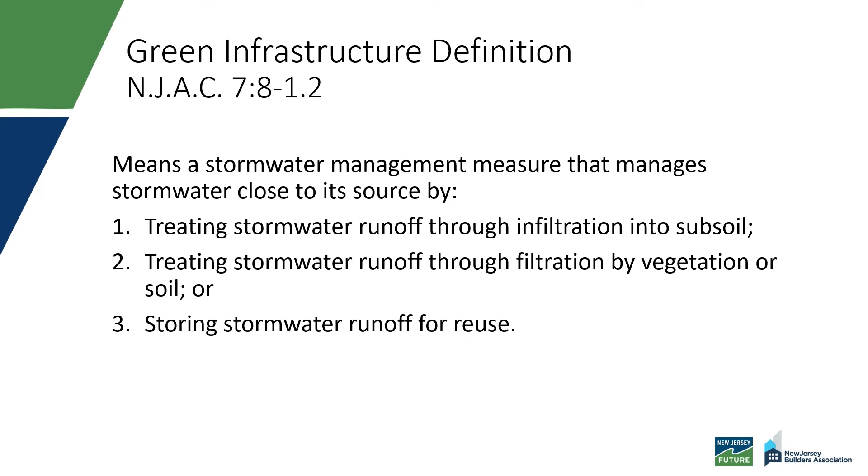The department incorporated into the new definition the specific time frame within which prior development must be considered in conjunction with the proposed new development to determine the ultimate impact of the development. The dates are now clearly specified within the definition in an effort to cut down on attempts to circumvent regulation by phasing or dividing projects into pieces that individually are below the threshold of major development.

As I mentioned, we are not changing the standards, just how the water quality standard is applied. Since motor vehicles are a significant source of suspended solids, water quality applies to the impervious surfaces constructed for these vehicles, and this is consistent with how water quality was triggered in the past. Roofs and sidewalks still need to be accounted for in terms of quantity and recharge, but not in terms of quality. Again, the motor vehicle surface term has been incorporated into the definition of major development.

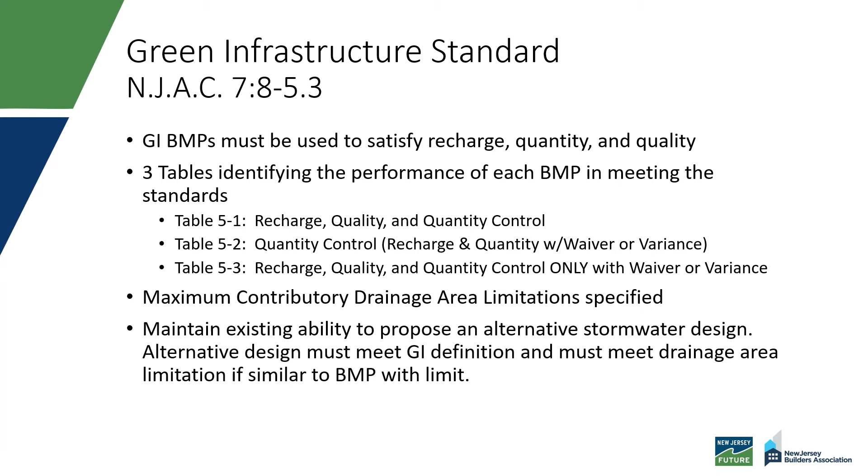Some of these BMPs cannot receive runoff from vehicle surfaces and therefore do not address water quality, like cisterns and green roofs. Others do not attenuate the discharge of stormwater runoff from larger design storms, so they cannot meet the quantity control requirement, like dry wells.

There are even certain manufactured treatment devices, or MTDs, that have a vegetative or soil component that meet the green infrastructure definition. Note that not all MTDs are considered green infrastructure. Lastly, these small-scale systems noted here have a limited drainage area that they can treat.

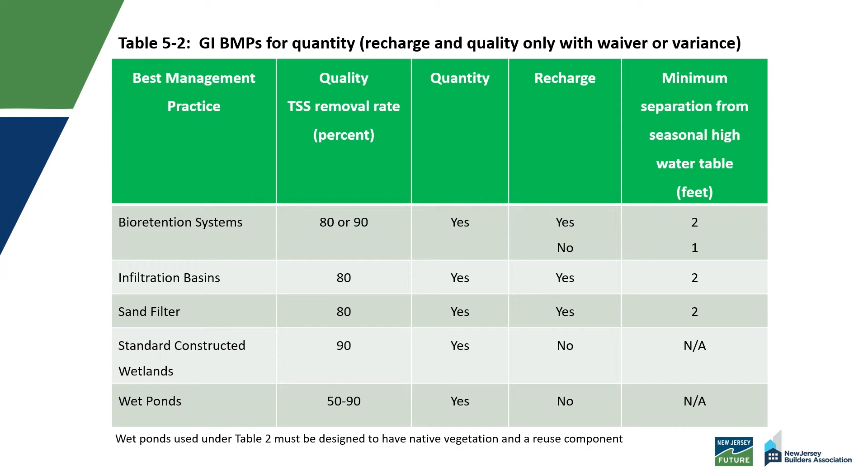Here's table 5.2 showing the BMPs that can be used to address stormwater runoff quantity control. These have drainage areas that are a bit larger or typically located a bit further from the source of the runoff and may only be used to meet the water quality and recharge if a waiver is granted.

The BMPs in table 5.3 always require a waiver or variance before they can be used. It's not anticipated they will be used much in the future because of what is required in order to grant a waiver or approve a variance.

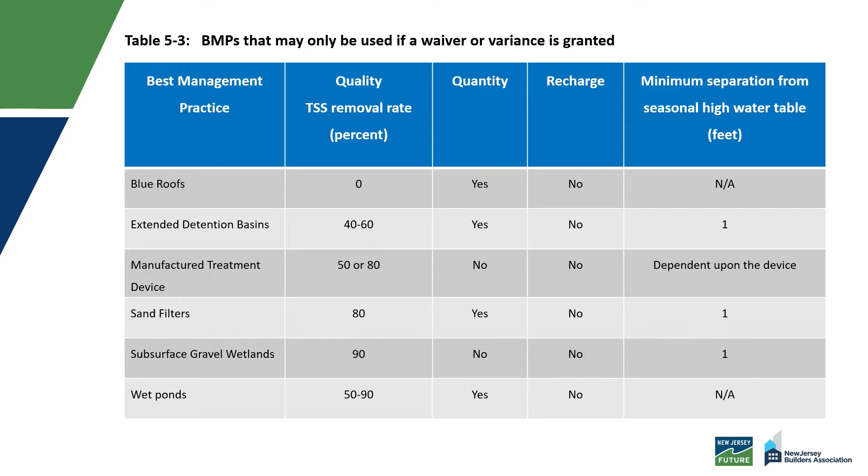Blue roofs don't have a reuse component, and extended detention basins are typically large and require additional treatment to meet water quality standards. The bulk of the MTDs do not have a soil or vegetative component, so they fall into this table. And we don't see many subsurface gravel wetlands or wet ponds, as wet ponds have a 20-acre minimum drainage area requirement with no reuse component.

So just a few things to remember under the newly adopted rule amendments. Prior disturbance since 2004 and on, in combination with any newly planned disturbance, may cause the project to be considered a major development and subject to the standards. Green infrastructure is required to be used, and stormwater runoff must be treated close to its source. For water quality, it's motor vehicle surfaces and not impervious surfaces under the modified definition.

You can see the rule proposal and the rule adoption document, which includes the response to comments. You can take a look at the web link that's noted there to find these documents. One aspect of the rule is that it has a 1-year delayed operative date and does not become effective until March 2nd of 2021. In terms of development, there are grandfathering provisions specified within subsection 1.6b of 7:8.

These provisions address both local approvals and, where needed, department approvals in terms of what can be grandfathered in under the old version of the rules. I can't go through each aspect, but one component to be grandfathered would be to have a preliminary or final site plan approval from the municipality.

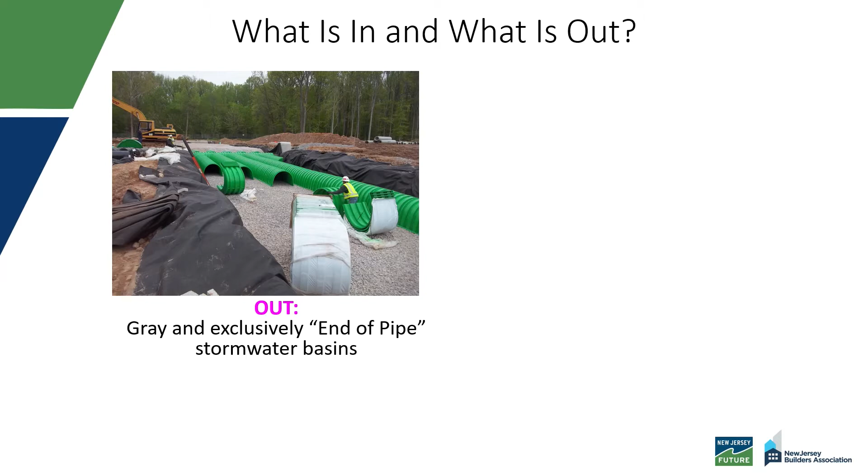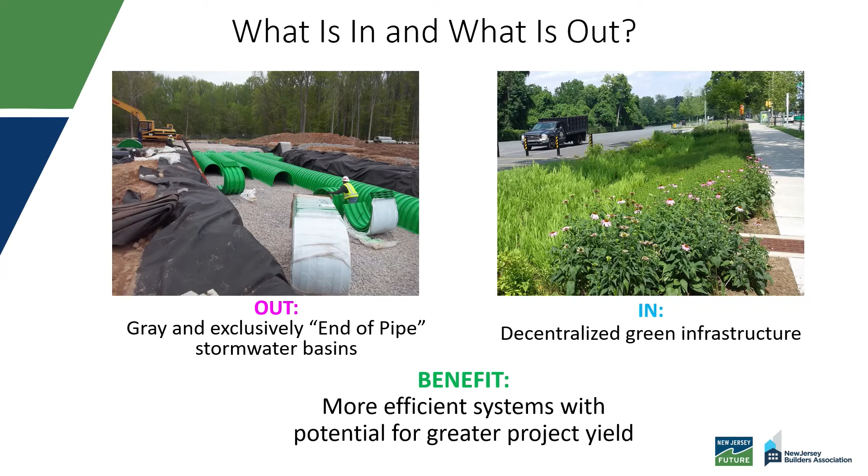So first, gray and exclusively end-of-pipe stormwater basins. I think we're all used to the practice of cordoning off a section of our sites, whether it's commercial, subdivision, mixed use, and identifying it to be our big end-of-pipe stormwater storage place. Under the new rules, what's in is a decentralized approach to green infrastructure. The benefit to be gained by this is more efficient systems with potential for greater project yield. And I don't know who's going to argue with the potential of getting an extra lot or more developable area on a project site.

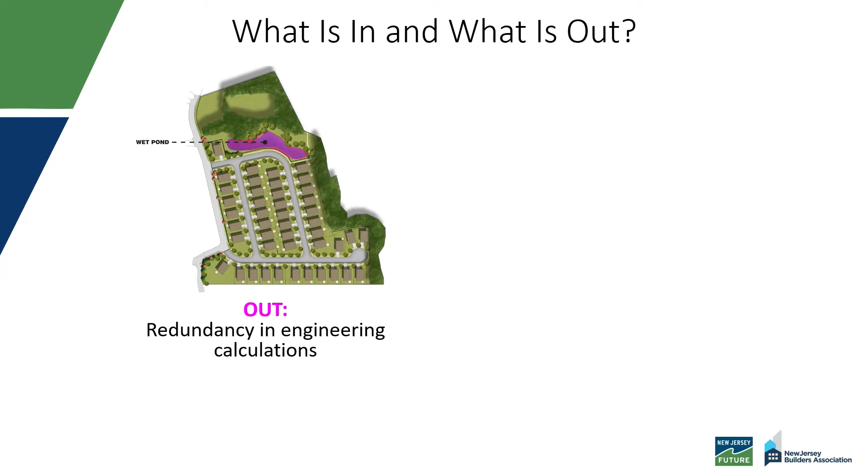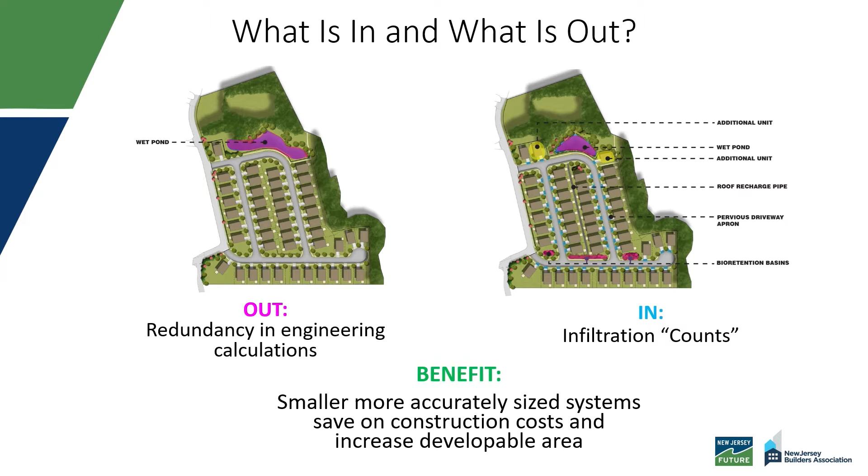Another thing that's out, redundancy in engineering calculations. What I mean by this is we're required as engineers to assume that certain natural processes such as infiltration either don't occur or will fail at some point. This results in over-designed stormwater systems. So what's in, as part of the BMP manual updates, is that infiltration will count. The benefit of this is that smaller, more accurately sized systems save on construction costs and increase developable area. And again, who's going to say no to reduced upfront hard costs?

Structurally, the guide is broken down into 8 main chapters. I'm going to focus on the first 3 in subsequent slides, but I do want to give a brief overview of what's in each first. So the first one, the New Jersey rules and requirements. Jim just went through this. We're going to highlight a couple key pieces of this section in a few moments.

Section 2 is the largest section in the guide. It covers types of green infrastructure. This is a high-level overview of different BMPs included in tables 5.1, 5.2, and 5.3. And it also includes a new decision-making tool that we've developed to help identify which ones are best for any given project. And we'll have more on this in a moment as well.

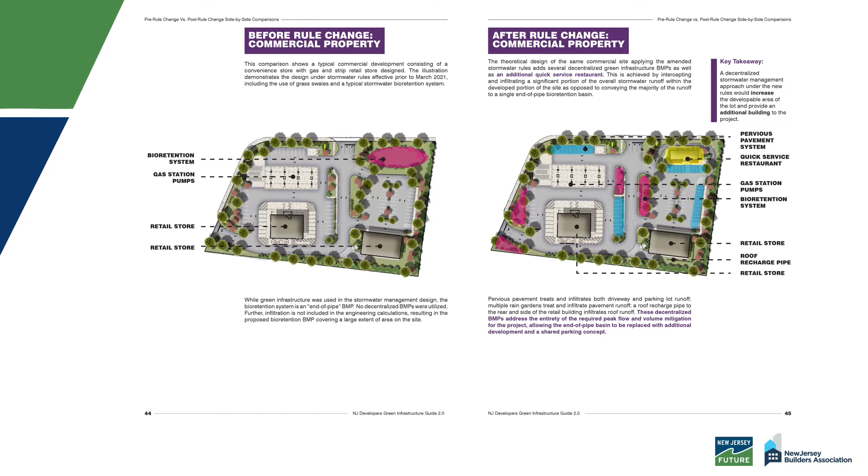It's a straightforward side-by-side comparison, highlighting like items on the left under the old rule and how stormwater management becomes dispersed and decentralized under the new rule. Again, there's a web component to this that is more interactive. You'll see that there's a little slider arrow and line on the right side of this image.

As that slider gets pulled to the left of the screen, it starts to reveal the application of green infrastructure on the site. You'll see that the large pink circle, which was just an end of pipe basin, is becoming replaced by several smaller pink rain gardens and blue pervious pavement areas.

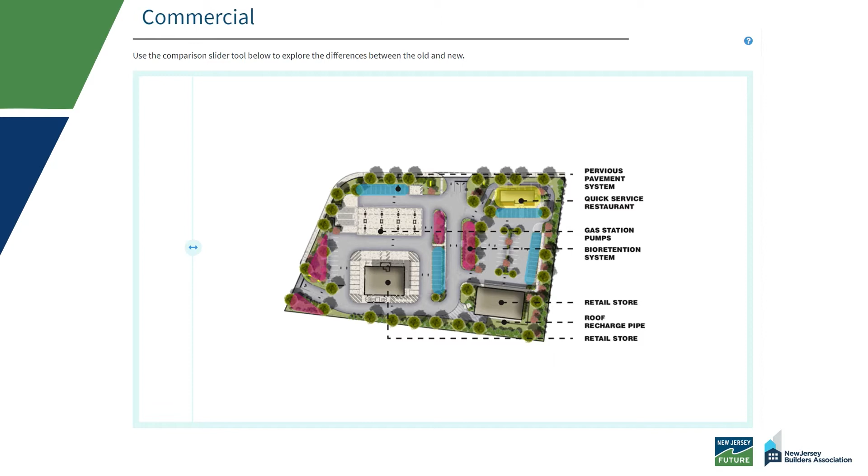This increases the developable area on the site, which when you pull the slider all the way to the left, you can see in this case is a quick service restaurant highlighted in yellow. So this is an extra amenity added to the site, not possible under the old rule, and is now possible under the decentralized approach of green infrastructure.

So these are just some of the examples that we've put throughout the guide. We've tried to address as many of these challenges as we could in the guide through these chapters as well as the additional 5.

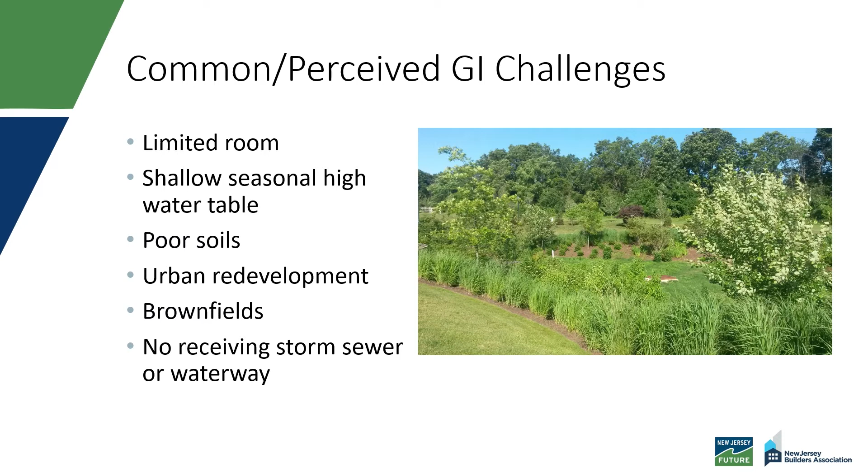Here's a site example where we capitalized on the limited room by using green infrastructure to almost create additional space. And we did that by having the green infrastructure serve in multiple capacities. So in this case, we created a multifamily cul-de-sac. So essentially the center of our cul-de-sac is the green infrastructure area. That enabled us to create more frontage along the cul-de-sac. So we actually have 3 buildings around this as opposed to 2.

It also gave us a nice view shed. All these units kind of front this cul-de-sac. So now they've got a nice view shed to look at. Instead of just a big paved area with parking lot and garages, they've got this very attractive area to look at. And then finally, it's providing stormwater management. So the end of pipe system in this development is actually significantly smaller because of the infiltration we're able to achieve at this location.

Green infrastructure can take many shapes and adapt to a specific site. So not only in the example you're seeing here, but it can fill in leftover areas all over the site. That might take the form of parking lot islands in a commercial application. It could be filling in irregularities created by property lines or easements on a site. And then other site constraints, such as freshwater wetlands or riparian zones. Basically all those leftover areas that aren't the nice squares or rectangles, we can fill those in with green infrastructure, stormwater management, and then reduce the end of pipe areas.

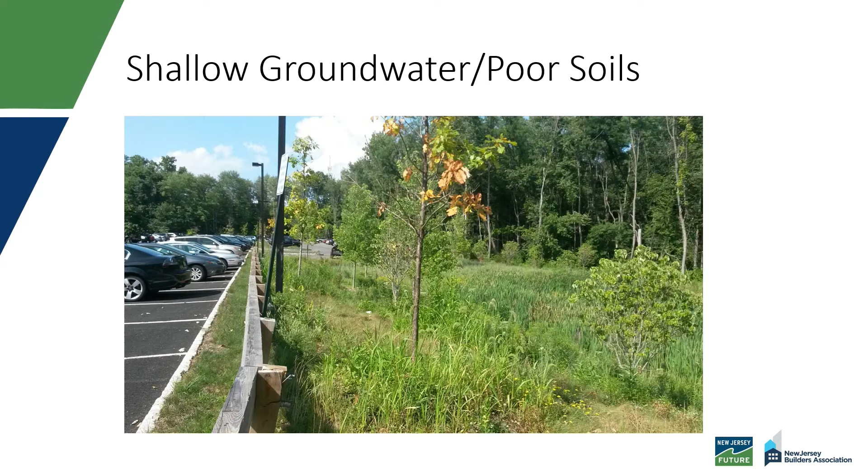So when you've got a lot of water in a challenging area, there's a solution for that. And you'll see on this slide that solution is to work with nature and create a pond, or what we call a wet pond. This works great with shallow groundwater and poor soils as well. In fact, poor soils are arguably a plus. We generally line these ponds, but the poor soils act as a plan B. This achieves more than just water quality and quantity attenuation.

So the makeup well would only operate in periods of drought, but in most periods throughout the year, the storage volume between the first outfall and the turn on elevation for the makeup well, that volume of water is, first of all, all stormwater runoff. And second of all, it's the primary supply for the irrigation system. So a great combination of uses.

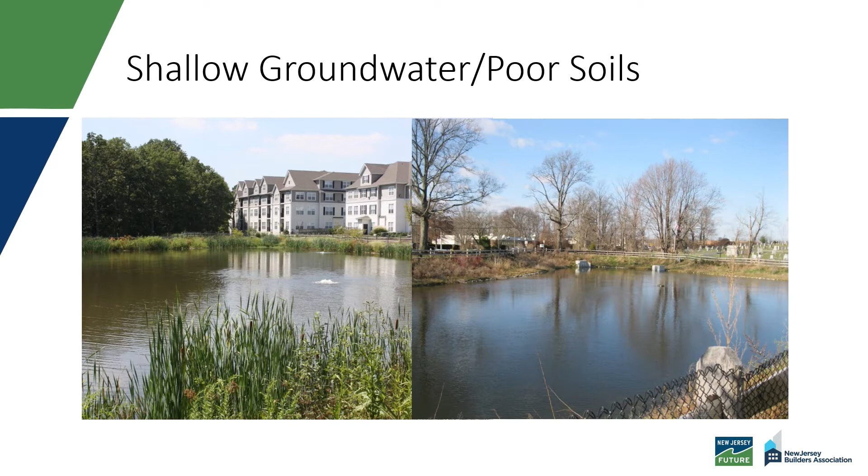Another very flexible solution is porous pavement. This also works well in shallow groundwater and poor soils conditions. In a shallow groundwater condition, it works well because it's a relatively thin installation, and it is right at the ground surface. You don't need any depth. The BMP starts right at the paved surface.

The reason for that is, as the snow melts, the water is going straight down into the porous pavement as opposed to running across the pavement surface where it can refreeze as black ice. Also, the air movement under the snow, because of the nature of the porous pavement, helps to melt the snow and ice much quicker. So these are just some additional benefits on an already very effective BMP.

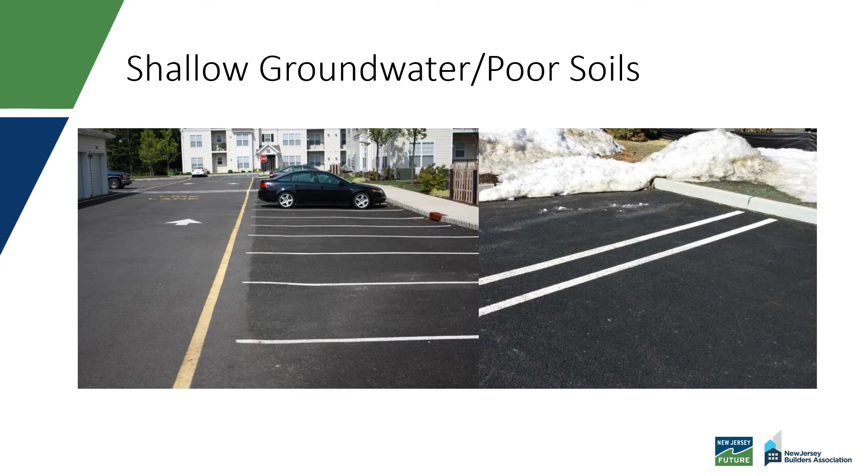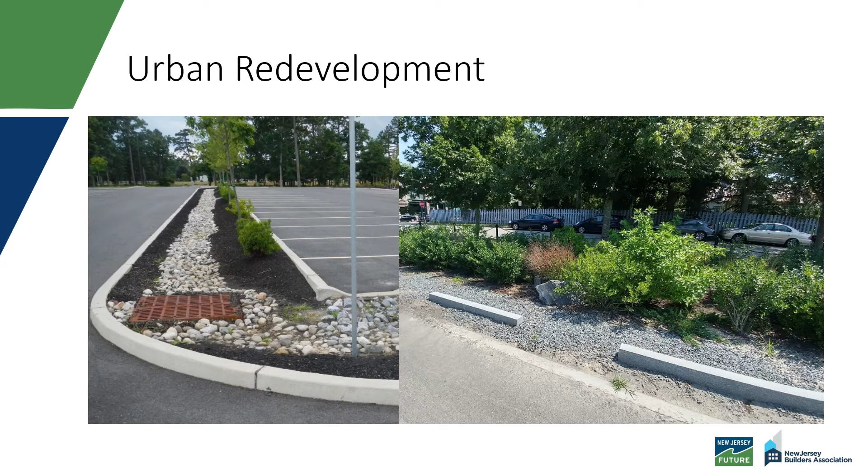In terms of flexibility, the same is true for brownfield sites. GI will work very well on a brownfield site. The twist here is that you have to line it to separate it from any capped areas, and then you're often under draining those GIs as a result. Typically, we can't put water into the ground on a brownfield site. There are exceptions to that, so you would certainly work with your environmental professional to make those determinations.

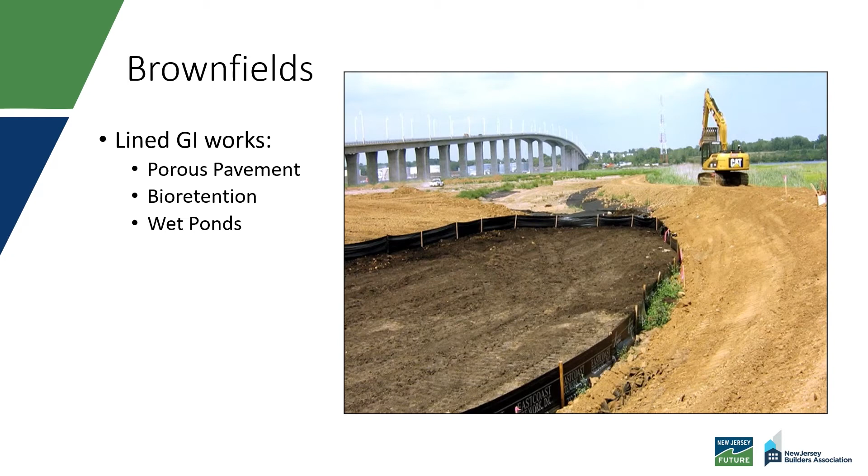Speaking of challenges, I'm often asked how to have GI work on a warehouse project site.

Warehousing can be tough for decentralized GI just due to the coverage intensity. There's obviously an enormous amount of rooftop, as well as truck loading docks, trailer parking, passenger vehicle parking. So it does make for tough and arguably maybe even the toughest application for GI, but it's far from impossible. Roof area is probably the most difficult thing to deal with just due to the sheer size of the roof and the generally 2.5 acre drainage area limit for those Table 5.2 BMPs that Jim went over earlier.

So one of the several solutions to this is using underground roof recharge. This can take many forms. In this case, it's a Cupolex system underneath the loading docks. You're already doing a concrete pad in those areas anyway, so you're already building the roof, if you will. So it's really just the form work and then the additional concrete to create the pillars that you have to add, and of course the stone bed below. These are very effective for infiltration because you are getting a full, clear space volume as well as the stone volume voids underneath that.

Some other alternatives, though, could include things like pervious concrete in the dolly pad areas or in the parking lot areas. It could include a perimeter bioretention. And this can be done in a couple different ways. It could be just literally a ring around the site, and then you provide some check dam separation to meet the drainage area requirements. It could also be breaks in trailer parking areas. They may line up with the man door accesses in the loading dock area. So you have a nice visual kind of synergy.

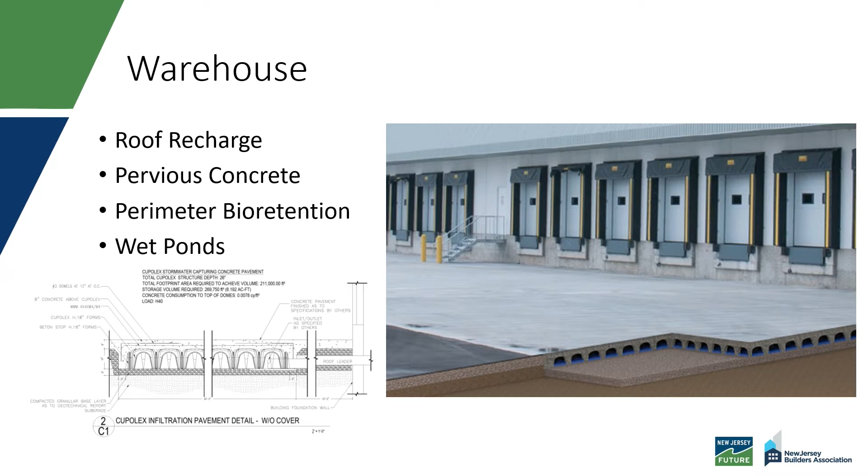Next is another sample project completed right here in New Jersey. This was in Mount Olive, New Jersey. It has a Cupolex system as well. This one's not under the loading docks. It's in a standalone area. This could easily be under a parking lot or under the trailer storage area, wherever the soils and the site layout makes sense.

In the current warehouse market, these types of systems are very cost effective because you're allowing those circulation areas or parking areas to do double duty. And then you're decreasing the amount of end-of-pipe stormwater needed, which can often lead to an increase in the gross floor area that's achievable. And in these industrial and warehouse uses, that per square foot price is very valuable, and it's only become more so in this COVID-19 world.

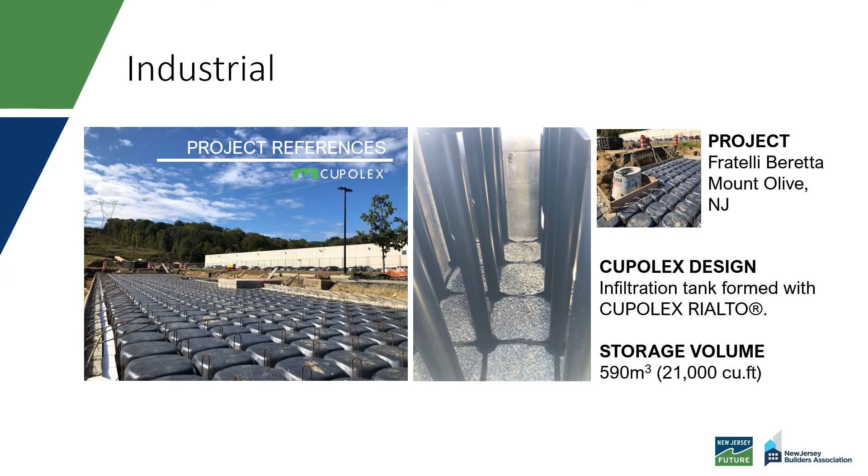Of course, the go-to GI approach for these sites is still bioretention. It's definitely the cheapest way to go, the most attractive. It's just a question of how much land area you have, how much of those irregular areas I spoke about earlier. So you want to try to use up all those leftover areas, and then whatever's left, you're going to use a combination of these subsurface systems and a wet pond type system at the remaining end of pipe. So at this point, I'm going to turn it back over to Candace to recap and wrap up.